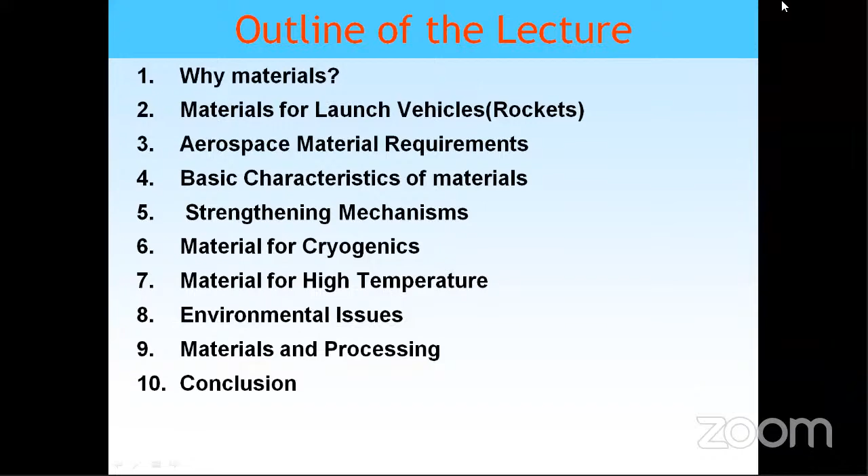Then finally, I'll come to some of the materials I have developed, which I have got some passion for. I developed a lot of materials, but these are some special things that I developed. Finally, I'll conclude. Thank you.

Materials for space applications work in a wide range of environments. Each gram of the structure with respect to the payload is very important. Every time we try to modify the upper stage - I mean rocket, actually we have a lower stage and upper stage. Upper stage will carry the satellite, and we do a lot of research to bring down the weight so that we can increase the payload. Another interesting thing is in a rocket engine, the same material used will be exposed to propellants, sometimes extremely low temperature as low as liquid hydrogen temperature, that is -250 degrees centigrade or 20 K, or high temperature during operation, it goes to temperature even more than 1000 degrees centigrade. So the material has to work in both conditions, either low temperature or very high temperature.

Then the material decides the cost of placing the payload into orbit. For expendable launch vehicles, the cost of placing 1 kg of payload in geotransfer orbit is about $30,000. So if I additionally put 1 kg, I can save $30,000. For reusable launch vehicles, this figure is proposed to be something like $1,000.

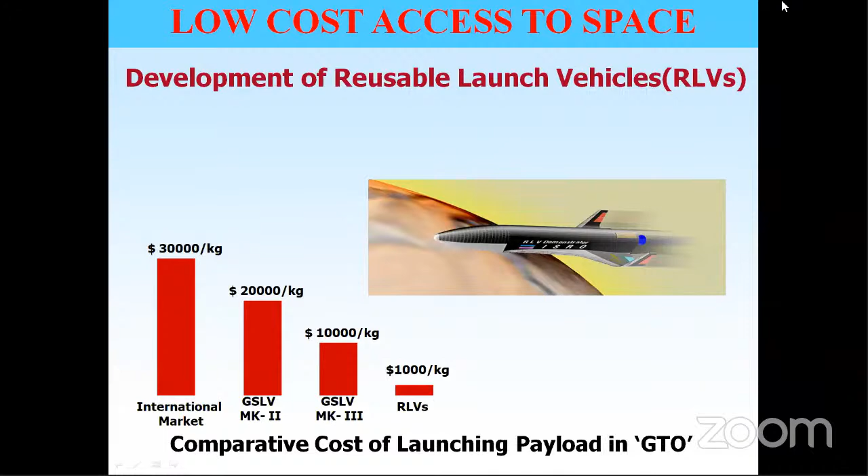These are our three launch vehicles which we use in ISRO. One is PSLV, which is mostly a 4-stage vehicle. We have a solid stage at the bottom, and the second stage is liquid. Again, third is solid, and the fourth one is liquid.

I worked in both VSSC as well as LPC, and I got good knowledge about all these materials used in PSLV, GSLV, and Mark 3. In GSLV, we use the cryogenic stage. Because of that, it can take 2,200 kg to GTO, and I'll show you why cryogenics is important for taking more payload.

GSLV Mark 3 is actually a 2-stage vehicle to GTO, and it can take 4,000 kg to GTO. We have 2 solid strap-ons and 1 liquid stage and a cryogenic stage. Now we are trying to develop a semi-cryogenic stage which uses liquid oxygen and kerosene. Once that is developed, this 4,000 will suddenly become 6,000 - that means 2 tons of payload straight away again. We are keenly developing that; I think within 1 or 2 years it will be ready, so we can take up to 6-ton payload to GTO.

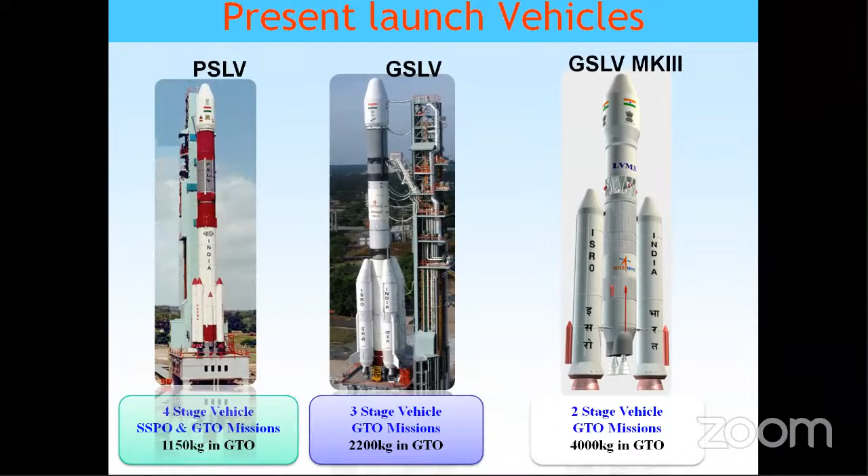Now these are the major materials used in PSLV, GSLV, and the PSLV upper stage. We use the lightest magnesium alloy for electronic housing, heat shield aluminum alloys, and titanium alloy tanks. Let me highlight some important materials.

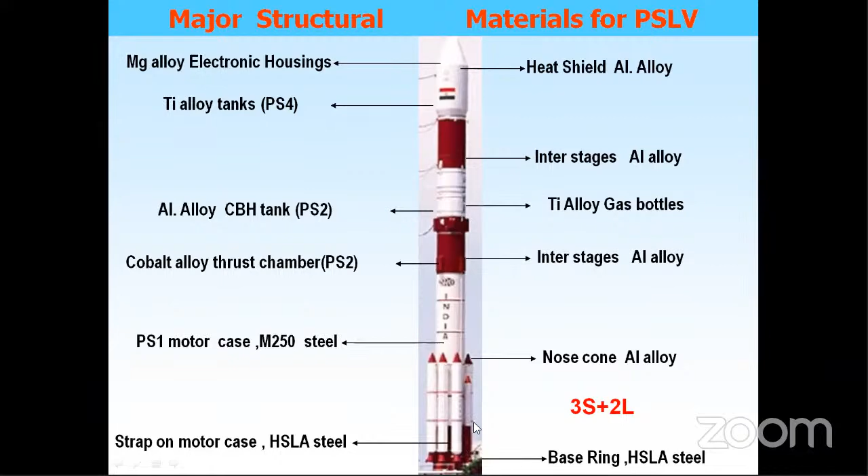Aluminum tankages are used for carrying the liquid propellants. There is a cobalt alloy system used for the liquid engine, where the temperature reaches as high as about 1100 degrees centigrade. The motor case is made out of M250 maraging steel - that is our workhorse material. The strap-on material is HSLA steel containing 0.15% carbon. These are the important things about PSLV materials.

Then we have GSLV - same thing, except the difference is we have cryogenic tanks here. Both are made out of aluminum, for storing liquid oxygen as well as liquid hydrogen. Then we have a cryogenic engine which contains copper and special steels for cryogenic application.

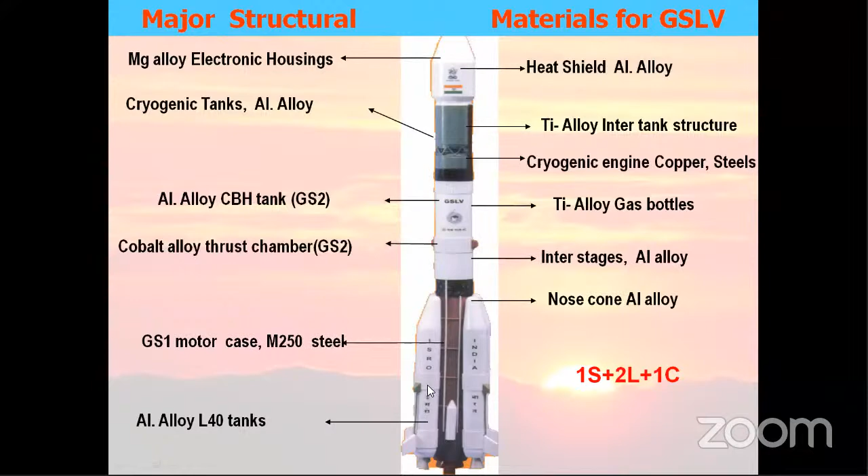Similar to PSLV, we have a liquid engine where we use cobalt alloy for the thrust chamber. Instead of solid, here we have liquid engine strap-ons, so we use aluminum alloy 2219, which is an aluminum-copper alloy, as the tankage material. The engine again is made of the same cobalt alloy, and there's a maraging steel booster.

Then comes our GSLV Mark 3, a 2-stage engine, where we have 2 maraging steel strap-ons, S200, and one L100 aluminum alloy tank. There again cobalt alloy is used, and this is a cryogenic stage where we use liquid hydrogen and liquid oxygen, giving about nearly 20 ton thrust. Here the satellite will be placed.

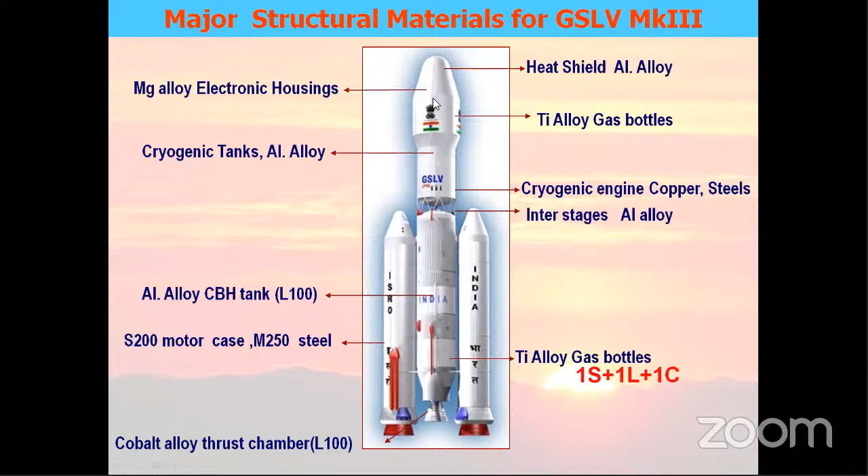As I mentioned earlier, why are we so much concerned about cryogenic propellants and stages? What we need is high propulsion energy per unit mass. LOX - liquid oxygen and liquid hydrogen combination - gives the highest combustion temperature, about 3,500 K, and the lowest molecular weight of combustion products.

Am I audible? I'm sorry, am I audible? Yes sir, you're audible. Okay.

Then we have a new term - normally only rocket engine people use this term known as specific impulse. That is actually combustion temperature divided by the square root of molecular weight of combustion products. So the specific impulse of cryopropulsion yields about 445 to 456 - highest performance is essential.

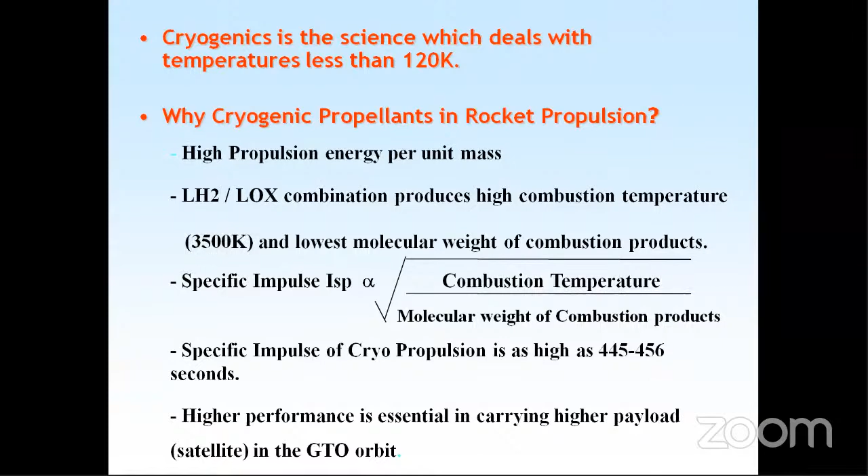In other words, it is the efficiency of the fuel-oxidizer system to give 1 kg of thrust - 1 kg of propellant fuel system gives 1 kg of thrust, and it is a duration. That means it's the duration through which 1 kg of fuel combination gives 1 kg of thrust. So cryogenic gives the maximum duration for giving this thrust, meaning it can take more payload and travel further. Here are some of the propellant combinations and their specific impulse.

Like we have N2O4, nitrogen tetroxide, and methyl hydrazine; unsymmetrical dimethyl hydrazine gives 295, and these are all actually used in liquid engines. And we have mixed oxides of nitrogen, that's MON3, and monomethyl hydrazine gives about 305. This is what we use in the satellite to reach geostationary orbit as well as for orbital control. This fuel only we are using.

And then we have the LOX. These are 1, 2, 3. All three we are using in ISRO's program. In fact, outside, NASA, the Russians and all are using all of these. We have LOX kerosene, which we are developing, known as a semi-cryogenic engine, which gives about 335, and LOX methane gives about 350 to 360. That is the new Raptor engine which SpaceX is actually using.

Hello, yeah, tell me, anything else? Can I continue? Yeah, you may continue, sir.

Okay. LOX methane is giving 350 to 360. Why am I talking about all this? I cannot use the same material used for these two fuel combinations, which we call earth storable. That means it can be stored on earth. So we call them earth storable engines or fuels and oxidizers. Whatever I used here, I cannot use for this application. For LOX kerosene, majority I can use, but in some special areas I have to use different material.

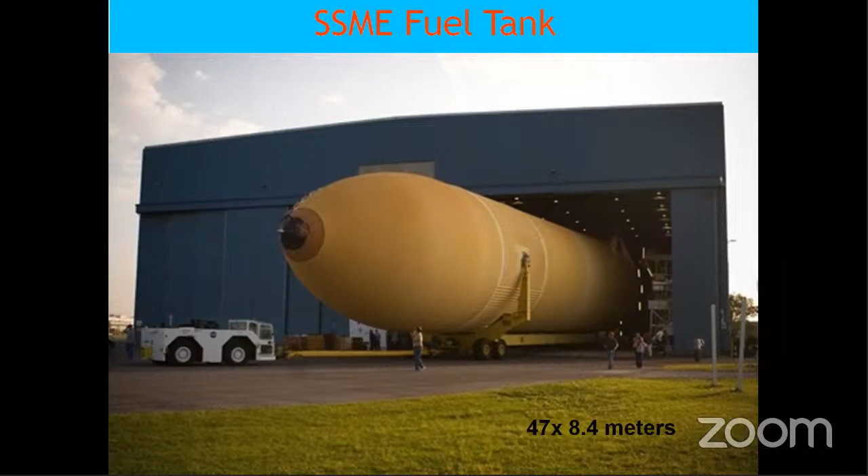But NASA, for the last flights of the space shuttle, used aluminum lithium alloy, which we'll discuss in my presentation, which has a much superior payload gain. So they switched to that. Welding such a huge thing is why I'm telling all this. In a cryogenic tank, because hydrogen is lightweight, we have to make tanks as big as this. That's why SpaceX is not using cryogenic tanks; they are using only LOX kerosene or LOX methane, which doesn't need such big tanks. Even though there is a loss in specific impulse, they are managing with that. They make a lot more engines instead of making one cryogenic engine. So that is the newer approach.

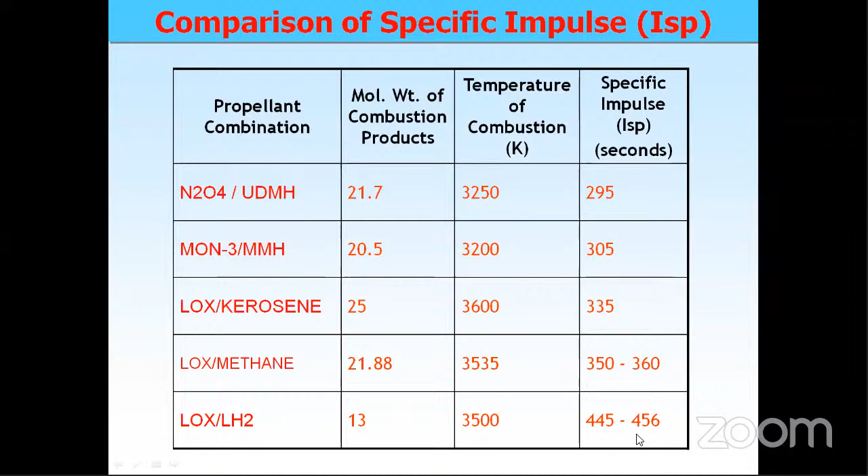Now we'll come to the aerospace material requirements. Till today, you can see all this. Till today, I don't have a single alloy which meets all these requirements. Okay, one alloy which is very close, almost 60% meeting, is actually our workhorse material called maraging steel, which my ex-bosses in VSSC, Sri Kumar sir, Dr. Sinha, are actually the developers of this alloy. And I'm proud of them because that was a successful indigenous material, and then this flight.

So we have a high strength to density ratio, specific strength, that's very important in order to give the maximum payload gain. Then we have high elastic modulus to density ratio, specific modulus. Then we have adequate fracture resistance. Everything maraging steel is giving, except for K1SCC. The K1SCC is nothing but fracture toughness in stress corrosion conditions. Actually, stress corrosion resistance of maraging steel is very, very poor.

Then easy fabricability and easily weldable. That is one very, very important, because I can make a lot of alloys, but if fabrication is difficult and it's not weldable, it's a problem. Simple heat treatment. Compatibility with the propellants, that is very important, and for fluids that I was discussing earlier. Then it should meet the functional requirements, easy availability and reasonable cost.

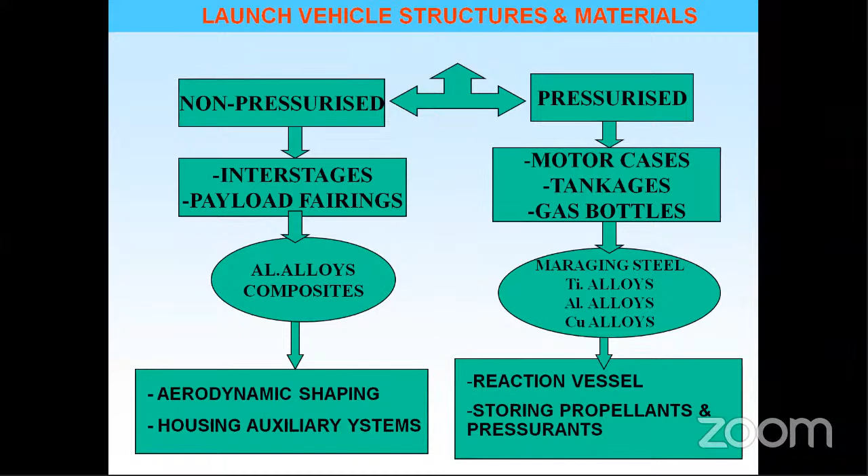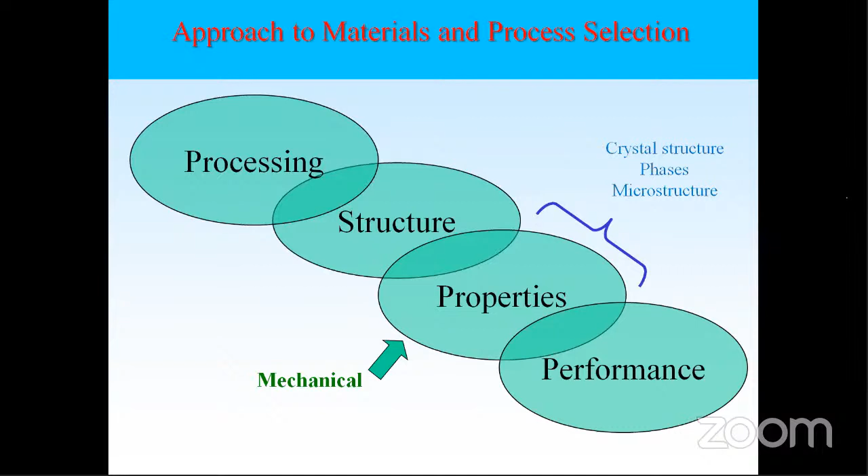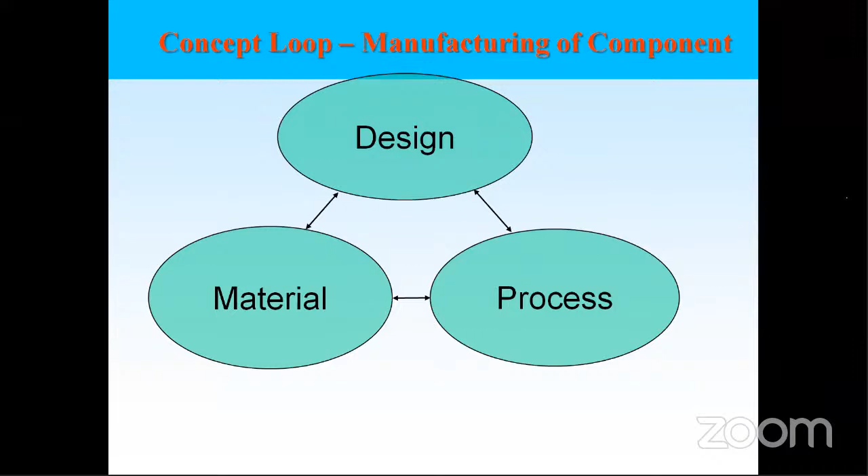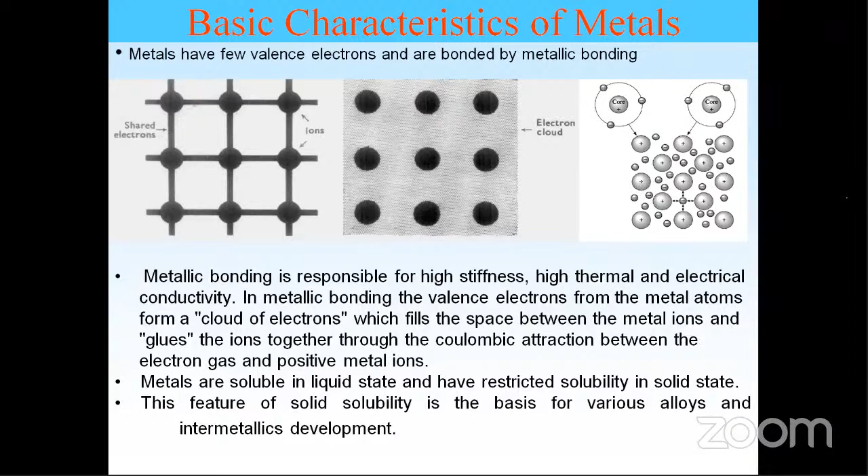Metals are soluble in liquid state and have a restricted solubility in solid state. So this is the principle of our heat treatment. And this feature, solubility, is the basis of various alloys and intermetallic development. Then this also you have studied mostly, but I just want to refresh it, because for every application, selection of material with respect to crystal structure is very, very important.

And in general, I'll tell you, FCC materials can be used at low temperature as well as high temperature, and ambient temperature also. Take the case of steel: all austenitic stainless steels are FCC, and they can be used at all temperatures, high temperature, ambient temperature, as well as low. Of course, nickel alloys fall in FCC, so they can be used at low temperature also. But normally at ambient temperature they are not used, because they are highly alloyed, so it will be costly.

So they are not very much preferential for the ambient temperature application, but they are needed for high temperature application as well as low temperature application. Then comes BCC, that is our normal steels, which is normally used only for ambient temperature application. They can be easily welded. But usage of this material is not advisable for low temperature as well as high temperature, because at low temperature they become brittle, and at high temperature they become too plastic. They don't offer any strength.

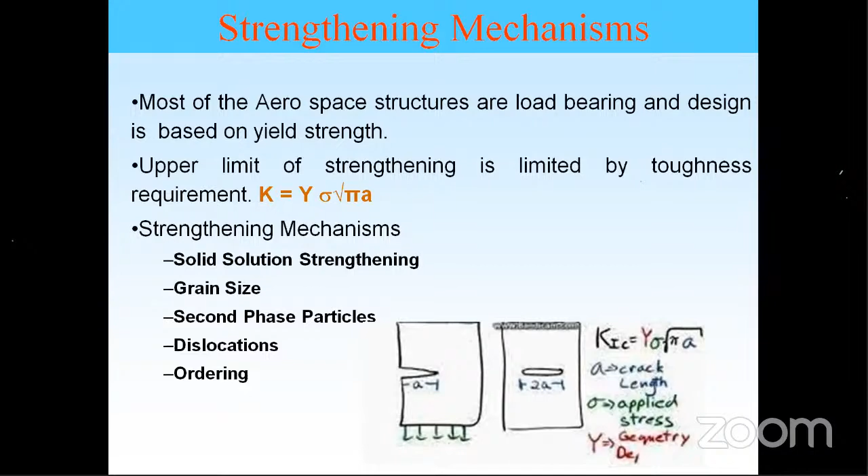Then we have dislocations. Dislocation is nothing but your work hardening, which introduces them; that's a cold worked material. It is a highly dislocated material. Ordering happens in superalloys, where the precipitates have an ordered structure.

Then we do a lot of testing to understand how a material deforms, elongates, compresses, twists, or breaks as a function of applied load, time, and temperature. All these are very, very important to select a material for aerospace. So first we have to see what testing we have to perform, so that you can select the material.

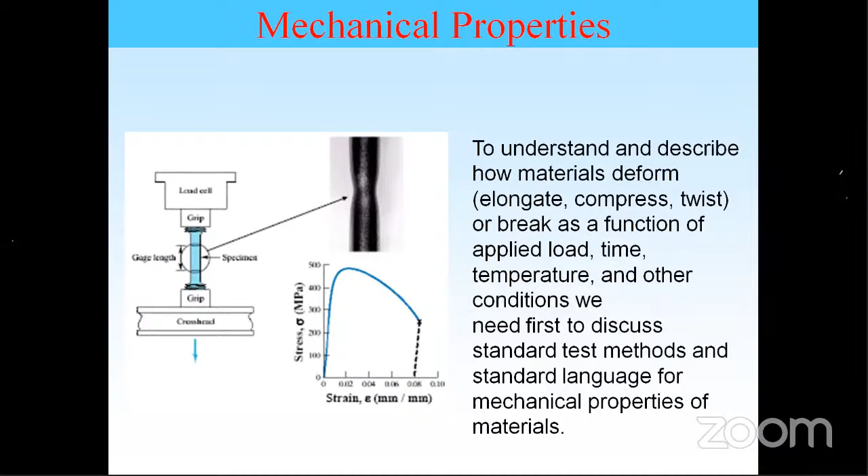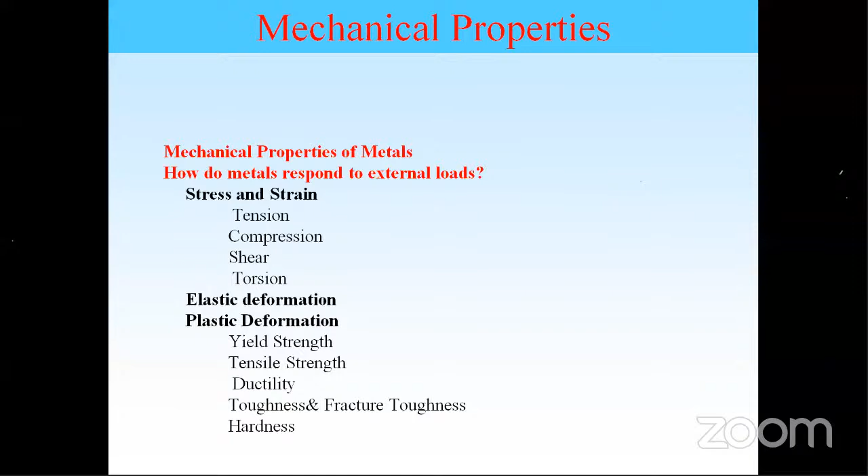Then we have tension, compression, shear. From there, yield strength, tensile strength, ductility, toughness, fracture toughness are some of the things we may measure. And of course, this is done both for parent material as well as the weld coupon or brazed joint. Before the actual use, we will be doing the testing to evaluate the mechanical properties of the material.

Then this is a tension test, with various stages. After the ultimate load, we have necking. Then finally the material fails. For tensile strength, materials up to 2000 MPa are also available. For structural application, yield stress is usually a more important property than tensile strength, and I can cite some examples.

Austenitic stainless steels, whatever we normally use, have a tensile strength of 500 to 550 MPa, and the YS is 200 MPa. That means the UTS is nearly double the YS. But when we take the case of maraging steel, 1725 MPa is the YS and 1750 is the UTS. That means it is very, very critical. There is not much work hardening happening in the case of maraging steel, whereas in the case of stainless steel there is a sufficient amount of work hardening, because there is a gap between yield strength and UTS. So this is very, very important.

Taking the design parameter: design stress is nothing but sigma d = n sigma c, where sigma c is the maximum anticipated stress and n is the design factor, which normally should be more than 1. We also make sure that the design stress is less than the yield strength. The safe working stress, sigma w, is YS by n, where YS is the yield strength and n is the factor of safety. Normally we go for 1.5 to 2. So that is the design parameter, the factor of safety we normally take.

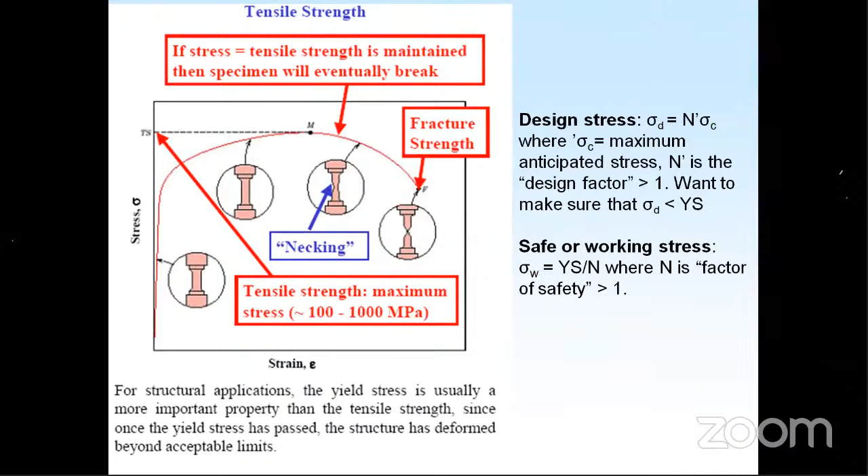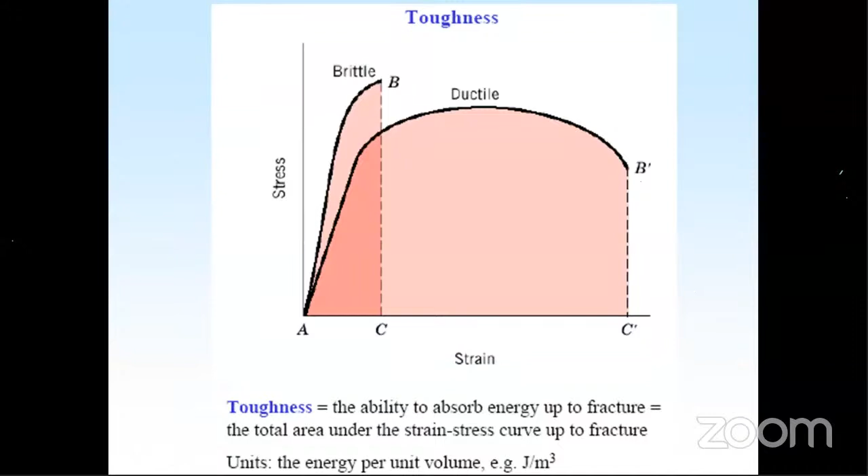So this is the typical stress strain curve. We have brittle and ductile materials, which you may be knowing. The area under the curve is your toughness. Brittle materials have lesser toughness, and ductile materials have more toughness. Then we come to the

Ashby charts. This is what I want to highlight. I've been working all our time only on this area. My younger brothers, you should work on this now, because we have done enough. So now it is your duty to enter into these areas. We still have a lot of scope here, but some gray areas are there in composites and ceramics that you should address, because the world is going that way.

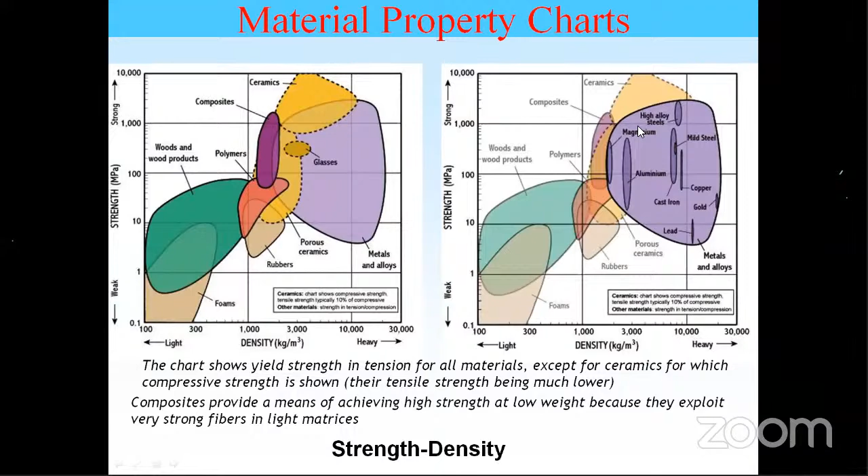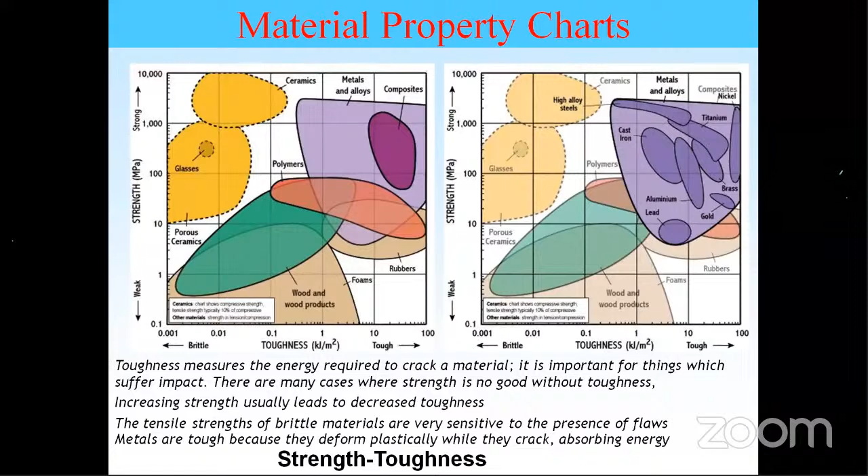My younger students should work on ceramics, glasses, polymers and composites to make a material which is in line with our metals and alloys. Among metals and alloys, titanium and nickel are the best. In fact, the advantage with nickel is that nickel is the only alloying element in steel which gives toughness. So all nickel containing steels show very high toughness, and nickel alloys also give high toughness.

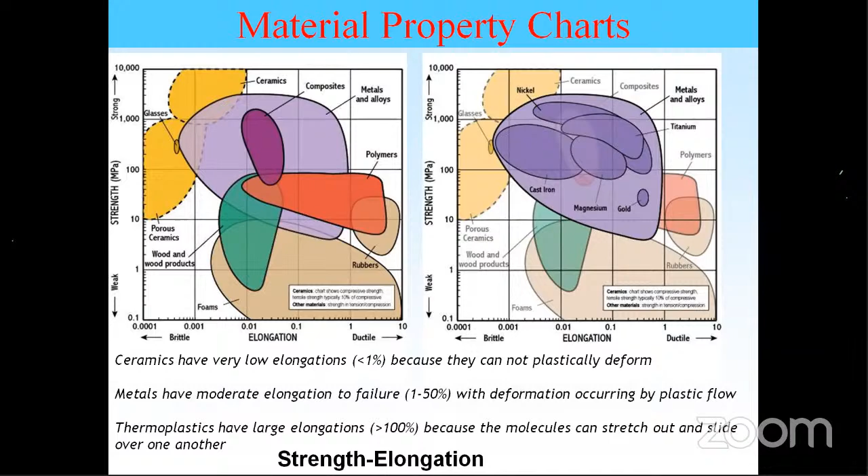Then we have strength and elongation. This is very important. In fact, we want the right corner; this corner is actually good. So there again metals and alloys dominate over all ceramics and composites. Here it's strength and elongation. Elongation is important because to form a shape, to form a component, for all forming operations, elongation is very, very important. So strength and elongation is very important, and strength is also required. So for this combination, the best things are still metals. So long way to go.

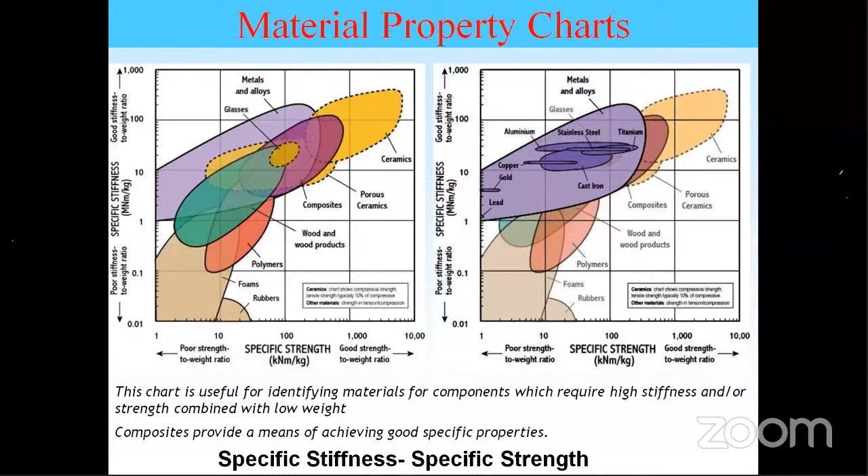Then if you do tensile testing of BCC and FCC materials, there is not much difference in UTS. But when you test the YS, for FCC material there's not much increase in YS, but for BCC there is a very big increase when you go to low temperature. That means at some point the YS and UTS will merge, and that is the point the material will become totally brittle. FCC means all austenitic stainless steels, copper, aluminum alloys, nickel alloys, silver, etc. BCC are ferritic and martensitic steels, columbium, iron, chromium, molybdenum. HCP is titanium, zinc, magnesium alloys.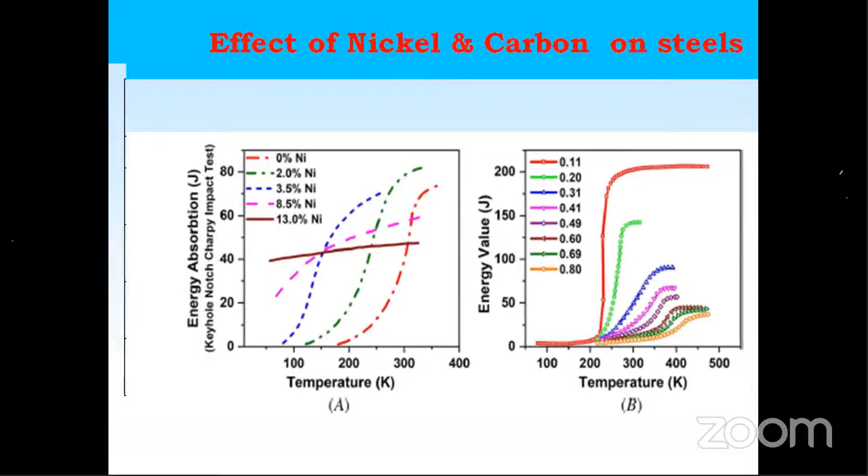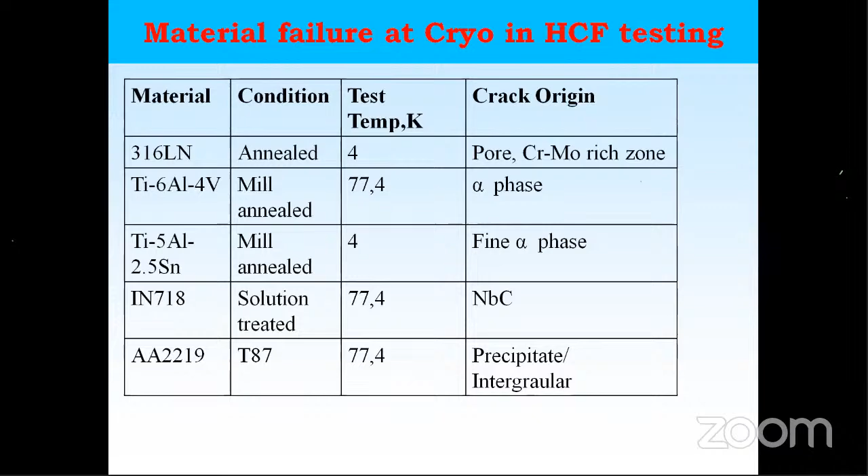Then these are some of the material failures happening at low temperature. We have 316 austenitic stainless steel, normally tested at 4K, that is helium temperature, where the failure origin is a chromium molybdenum inclusion. For Ti-6Al-4V titanium, it is the alpha phase at 77K and 4 Kelvin. For the alpha alloy at 4K, the fine alpha phase is the crack origin. For Inconel, known as a super alloy which we regularly use, it's niobium carbide; it's not a cryocompatible precipitate. Then 2219 has precipitates in the intergranular area. Those are the crack origins.

Then for low temperature, this is my view. I have already made most of the cryogenic materials for ISRO. My view is that for metallic materials there is no UTS and YS specification. If you see any standard AMS specification, there is no specification, because when I test a specimen of any material at room temperature, I mean steels, I get a very consistent value at ambient temperature.

The same specimen, if I take it to low temperature, up to 77K, that's LN2 temperature, gives different values, because a small defect or discontinuity present in the gauge length can alter the value. Even carbon in incidental amount locally present can change the value. So UTS and YS properties are very sensitive to defects as well as the deformation state. If I do some cold work or elastic deformation and test it, the value changes. So I don't have a fixed value.

So what we do at cryo temperature, all materials gain strength and lose ductility and toughness. So I give more importance to toughness testing - that is impact testing, fracture toughness, NTS, that is notch tensile testing. This ratio should be more than 1.1 at cryo temperature. If it is more than 1.1, it is safe. So the modern way of testing is to do a fracture toughness testing and evaluate the value.

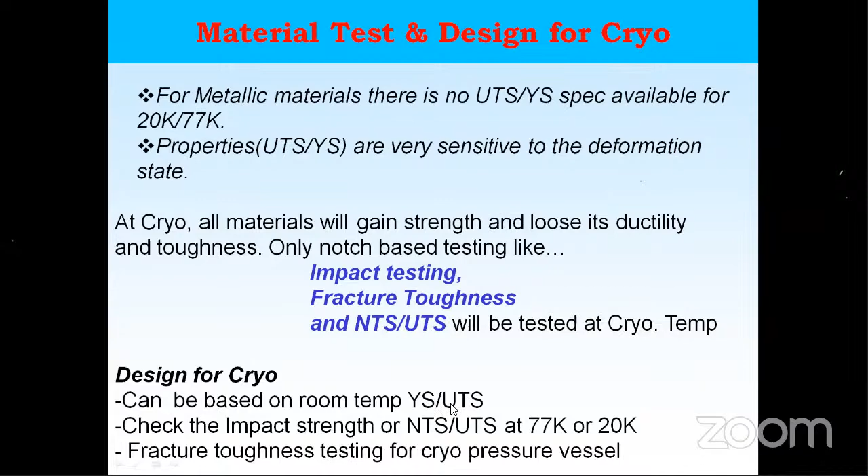Like that, the first screening is to go for impact testing. Then if it is a pressure vessel, go for fracture toughness design. If it is impact testing, then you can use room temperature YS and UTS and make your design, so that you'll have a sufficient margin. And the fracture toughness testing can be used for cryo pressure vessel.

Another physical property is thermal contraction and expansion. This happens in low temperature. A large amount of contraction occurs when materials go from high to cold temperature. So this impacts the alignment. Different materials have different alpha values, and development of interferences or gaps due to dissimilar materials leads to increased strain and possible failure, and phase transformation. So some of these things can happen with thermal contraction.

Specific heat, normally CP, decreases, and it has got two important points. First of all, the system cools down faster as it gets colder. At cryogenic temperature, small heat leaks can cause a large temperature rise because of the low CP.

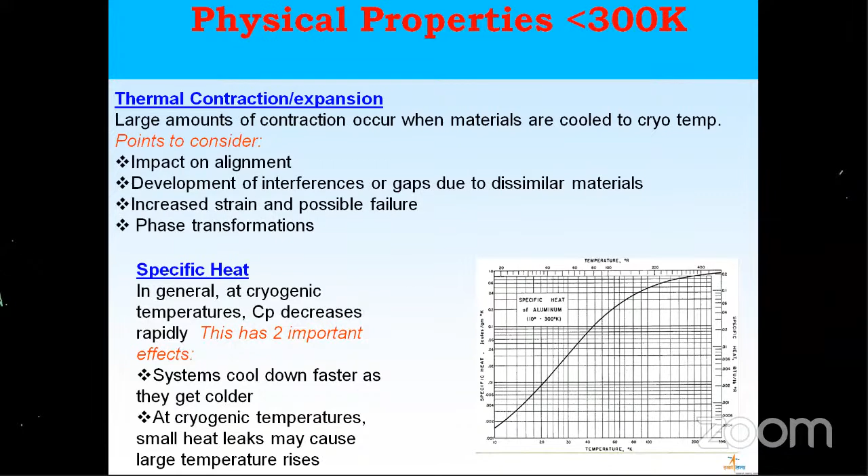Another important thing is the electrical resistivity. At room temperature it may not be noticeable, but when you go to low temperature, the purity of the material becomes very, very important. So there is a residual resistance ratio, RRR. It is the resistivity at 300K divided by resistivity at 4.2K. This shows the purity - purer the material, it shows very high thermal and electrical conductivity and very low electrical resistivity. This is the basis of superconductivity for metals.

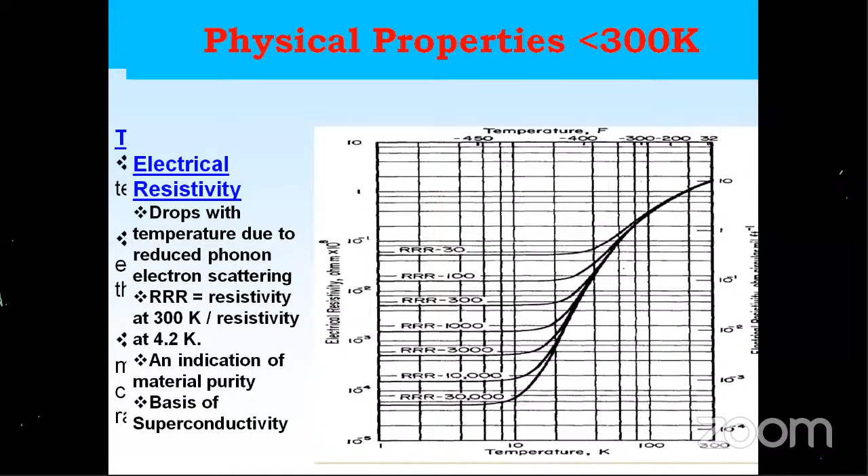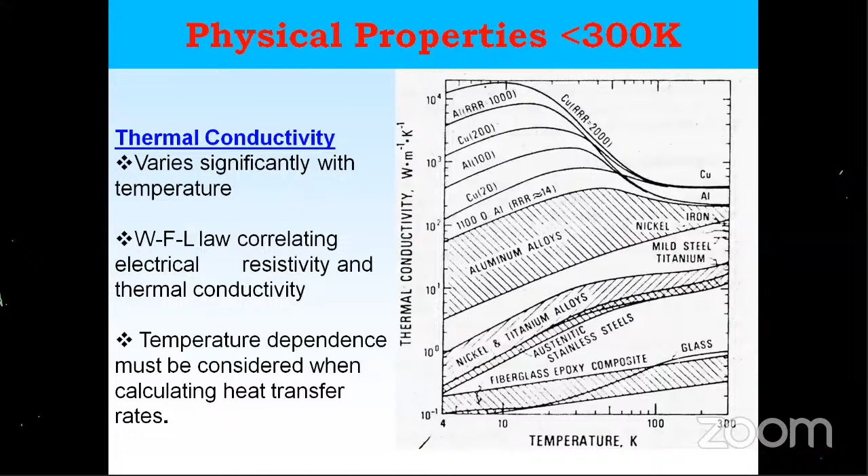Thermal conductivity for high RRR value increases at low temperature. Most of the alloys, it falls down. We have a relation between electrical resistivity and thermal conductivity, known as the WFL law.

So that's about how you select a cryogenic material - we go for impact testing and use the room temperature YS and UTS value for the part design. For high temperature, it is very interesting because most of the materials, we are storing propellants and firing, so many materials are exposed to high temperature.

At high temperature, again ceramics dominate in the charts. Among metals, nickel is the best material - FCC alloys, nickel-based alloys, and cobalt-based alloys. All FCC materials are actually best. All other materials are not good. Again, ceramics can be used. So we use a combination of alloys plus ceramic coating to increase the maximum surface temperature.

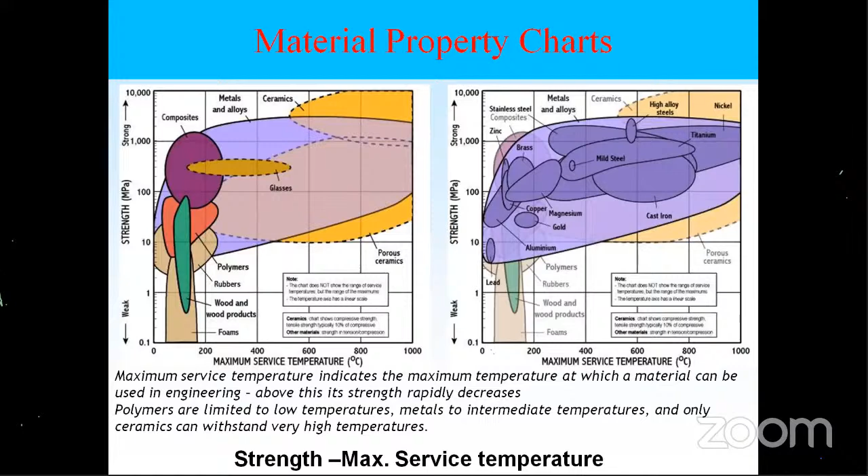Every 6 months I see a paper for super alloy development. At present the best super alloy can go up to 1200 degrees centigrade, and precipitation hardening alloys can go up to 850, 800 degrees centigrade with very high strength. It retains strength up to 850 degrees centigrade.

We don't need any oxidation protection coating here because superalloys contain a lot of aluminum and chromium, so that will protect the material from oxidation. Whatever we have beyond this - refractory metals, ceramics, graphite - all need a lot of protection coating from oxidation. Graphite gets silicon carbide coating, and refractory metals get special coatings to prevent oxidation. We use refractory materials like columbium, molybdenum, etc.

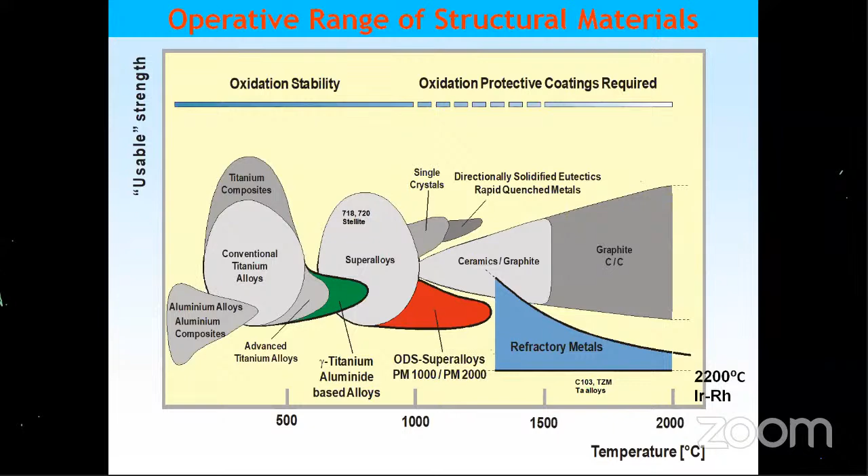How do you make a high temperature material? We have 2-3 techniques available. First, we go for solid solution hardening, like in cobalt alloy Haynes 25, where molybdenum, tungsten, hafnium - everything has been added to give solid solution strengthening, and it is not heat treatable - you can ideally use it as is. It will work up to 1100 to 1150 degrees centigrade without much issue, and with a coating it can go up to 1200 degrees. But the strength of the material is very low.

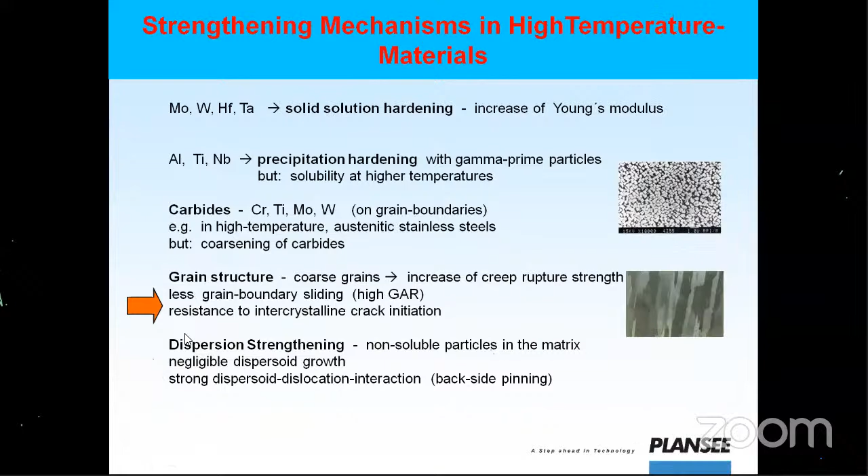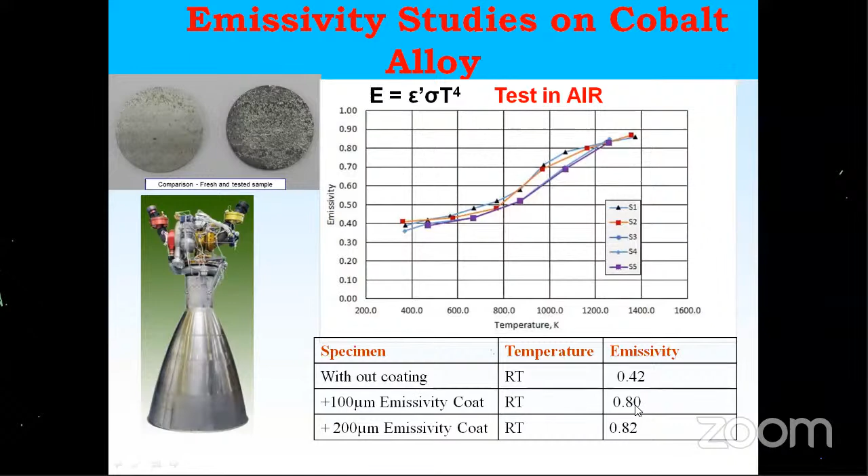For a radiator, there are two kinds of cooling happening. One is regenerative cooling - the regenerative cooling, nothing special is required. But when you are cooling with radiative cooling, like a single sheet, when you have a single sheet and heat has to transfer to the atmosphere, then we need a dull surface outside. So we need a dull surface like this, which gives an emissivity as high as 0.8. That's about the heat escaping to the outside.

Now, during combustion, the temperatures are reaching, as shown earlier, 3000 K. Now, to arrest the heat transfer to the chamber material, what we do is give a ceramic coating, which I was mentioning. Ceramics, especially zirconia, have a good property - they have a poor conductivity of one watt per meter Kelvin or less. So this will eventually break the heat transfer to the chamber material.

There are two kinds of coatings. It's done like this: first, this is the substrate material, then the bond coat, and over the bond coat we have the ceramic coating. The bond coat is normally nickel aluminide or a combination of many metals, and the ceramic coat is based on zirconia. There are two kinds of zirconia available - one is calcia stabilized and one is yttria stabilized. Both prevent the material from being heated up by the hot gases.

Normally in our engine we get about 50 to 100 degree margin. That is very good, and a comparison has been given. Interestingly, we call this nickel chromium aluminum yttrium, and this is 8YSZ. This has also been used in our aircraft - all Airbus and Boeing. They are also using it, and in fact Air India has got such a coating facility available in Bombay.

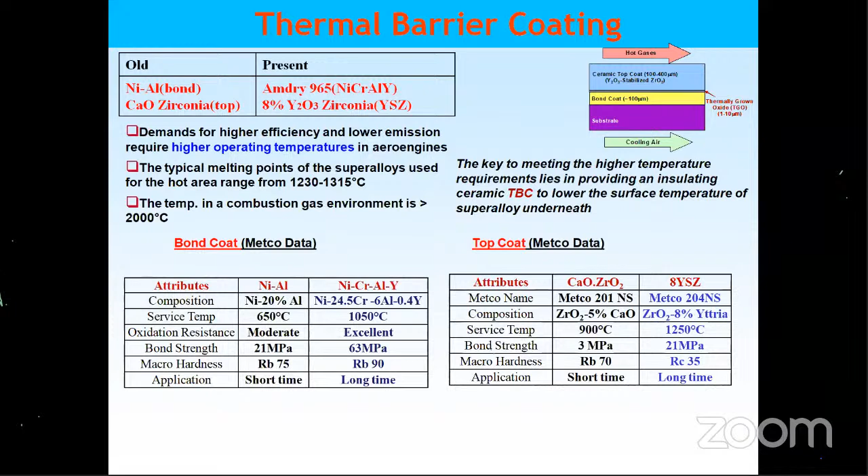Then, this is very, very important. This is, in fact, my own finding or my own idea actually. Normally, whenever I want to test a high temperature material, imagine I want to test at 1000 degrees centigrade, a normal UTM takes nearly 1 hour to get the temperature and test. In fact, our mission, whatever Vikas engine or cryogenic engine, Vikas engine I'll take, it's a radiation cooled engine. The maximum duration is actually 150 to 200 seconds, depending upon the range.

So, to test the material property at 1000 degrees, I need 1 hour. By 1 hour, the material will be very soft and it will give a lower value. So I just wanted to know, suppose I can test the material in 150 seconds at 1000 degrees, that will give a realistic value. So that's what I have done.

So here the conventional testing is like this. Heating time takes a lot of time, almost 4000 seconds. Whereas suppose I can test within 10 seconds, then my material property will be a different thing, I'm sure. So let us see. I have installed a machine called Gleeble, where my heating rate is almost 10,000 degrees per second. So with that, I could do the test.

So what we found is that the high temperature alloy which we have used is a cobalt alloy, and initially we had done it at 1150 degrees centigrade. That's the maximum temperature we expect in our normal operation. Then we had done it at 1200 degrees, which is margin. Again, 1250, 100 degree margin. Even every 10 degree margin is very, very important.

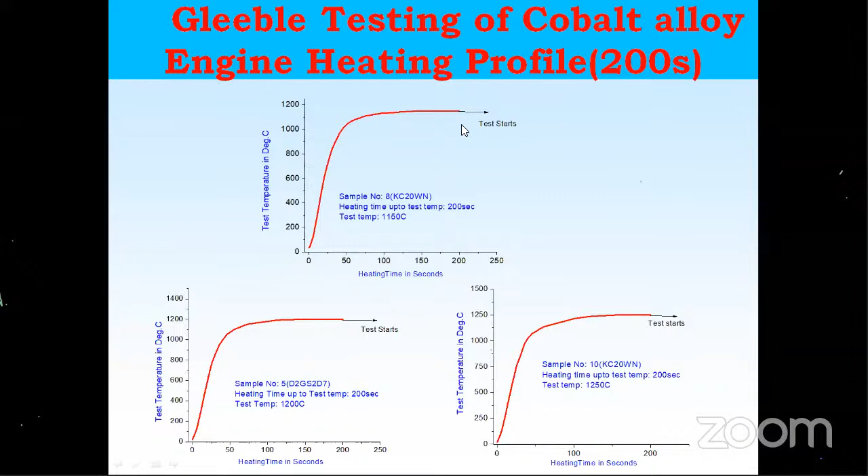And what we do is, within 10 seconds, I reach this temperature, and I keep it for the entire mission period of 200 seconds. Then I test it. That means after exposure only, I've taken the worst case of testing. Interestingly, I got very interesting results: at 1100 degrees, if I do a test the conventional way, I get only 92 MPa UTS and 61 YS. Elongation will be very, very high.

And if I do the same thing with the actual flight conditions, the test pattern I showed, I'm getting 208 UTS plus 137 YS. So even up to 1250 degrees centigrade, I'm getting a very high value. I could have gone more than 1250, but the problem is it is never warranted, so I didn't do that.

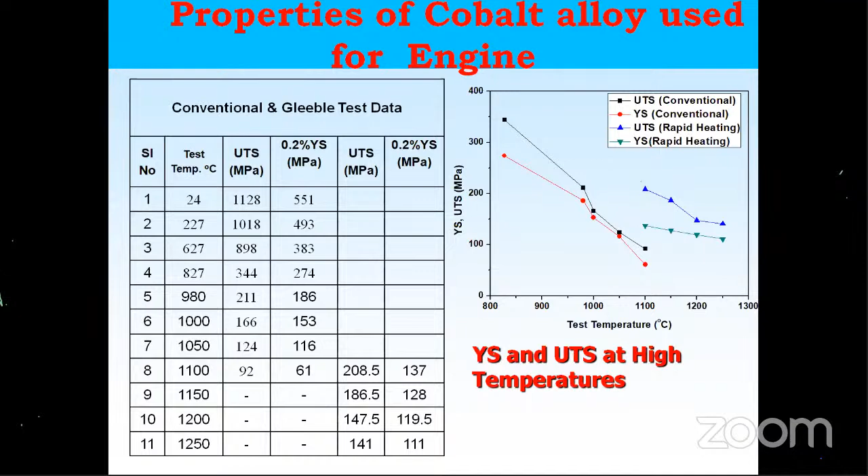So what I mean to say is, since we have a small flight period of 150 seconds, the material is retaining most of its strength. But suppose you increase the time from 150 to 500 or 600 seconds, the strength value changes. But for the launch vehicle missions we are using at present, this is the margin we are getting. We have sufficient margins, there is no issue. So if the composition is ensured, the material gives such strength.

Then we have environmental issues. Having told about cryogenics and high temperature, come to the environmental issues. Before that, I want to tell something about how a liquid engine works. Here we have oxidizer, we have fuel. For a storable as well as a cryogenic or semi-cryogenic engine, this is the same. From the oxidizer, using a booster pump, it comes to the main pre-burner. This is the gas generator. From fuel also, the same way, the fuel booster comes to the pre-burner.

The pre-burner generates the hot gases. There is an igniter, it burns there, and those hot gases come to drive the main turbine, which will give the propellant and fuel to the combustion chamber. This is the combustion chamber. And sometimes the same hot gases, after driving the turbine, will be sent here also to save the fuel and the temperature.

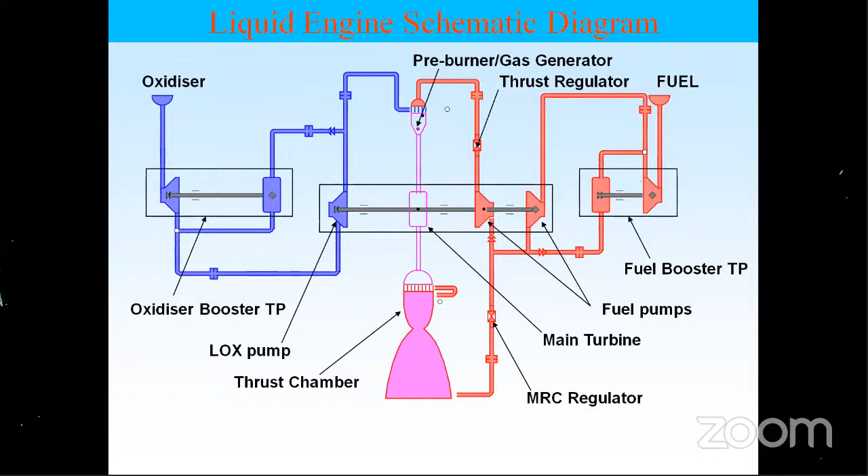So in the cryogenic engine we are using, it will be rich in hydrogen. In the case of the semi-cryogenic engine, it will be rich in oxygen. These two combinations totally change the concept of materials used there. So we'll go into that. First, we'll discuss the effect of hydrogen. Hydrogen is the best fuel. And in fact, Tata has already started working on that.

Actually, my dear students should see what the materials are useful for, because this is not an area where many people have worked. So this is a special area. We should put some light on this. It will be very interesting.

Hydrogen is the best fuel compared to gasoline, diesel, or even LPG or ethanol, and the energy per kg is much higher compared to all these. I'm so sure maybe within 5 years from now, hydrogen cars will be available. They will be cheaper than your electric cars, and greener, because with electric cars, a portion goes to generating electricity. Kerala has hydroelectricity, but other places still have to burn fuel for thermal power, so that way you're polluting. But with hydrogen, you are giving a green output product, that is water.

Compressed gas at high pressure has some storage issues, but that has been solved. Now we have up to 150 liter ready-made tanks available. Solid storage with hydrides has material and thermal problems; we cannot store it for a long time. A small experiment we can do, but for commercial purposes it is difficult. With liquid storage, maintaining that temperature is a big issue. So the only option left is compressed high-pressure hydrogen gas.

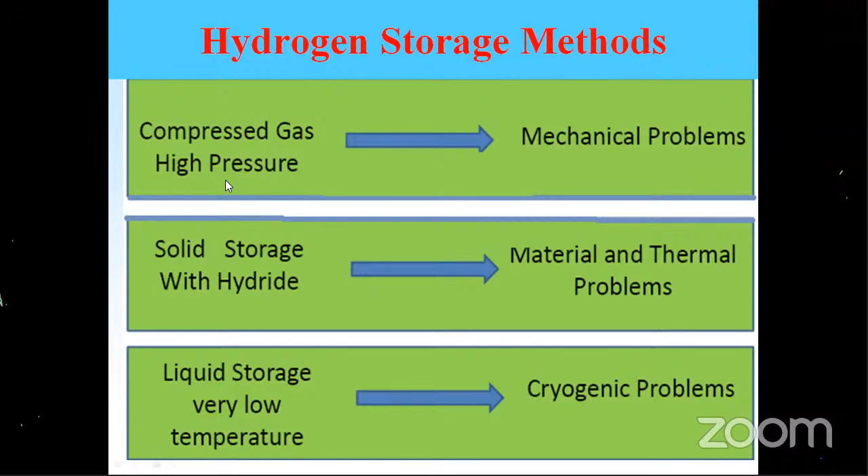All these issues were initiated by NASA. From the tank at minus 253 degrees centigrade the hydrogen comes out, burns, then drives the engine. By the process it picks up temperature, as high as about 823 degrees centigrade. From minus 253 to plus 823 degrees centigrade, it passes through many regions, where different materials are used and exposed to hydrogen.

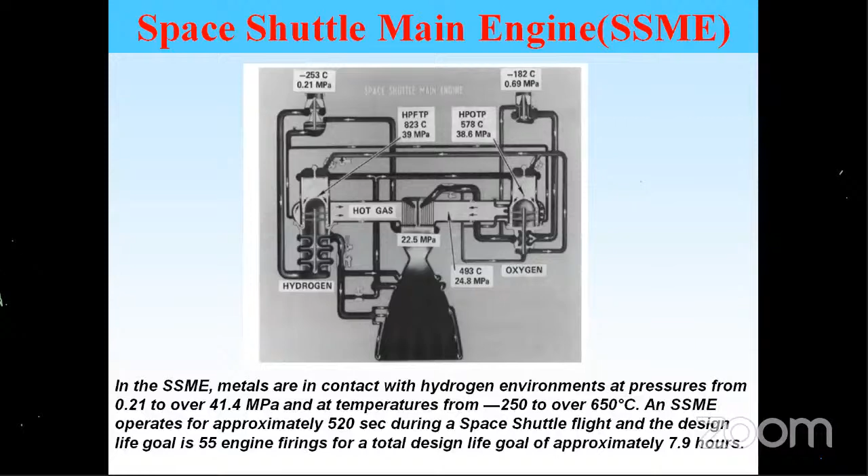Normally people talk about hydrogen embrittlement caused by internal hydrogen, meaning hydrogen deposited during electroplating or dissolved within the metal. What I'm talking about is not that. This is exposure to hydrogen gas, either liquid or gaseous hydrogen, GH2 or LH2. The SSME operates nearly 520 seconds in a space shuttle flight, is designed for 55 engine firings, and its total life is normally more than 7.9 hours.

With internal hydrogen, the failure normally happens as delayed cracking. Delayed means hydrogen enters the material and after 1 or 2 days, a week, or a month it cracks and fails. But this is different. In India we don't have any facility to test gaseous hydrogen effects. Somebody started in Bombay, but they withdrew because it is not safe. But a lot of data is available from NASA.

Like any tensile testing, you introduce a chamber, fill it with hydrogen, increase the pressure and see the mechanical properties at different pressures. The result is immediate. The moment you test a material in hydrogen gas, it suddenly becomes brittle. It's not delayed. Many materials have been classified as extreme, severe, slight and negligible, and material is selected based on that. In susceptible materials we call it HEE, hydrogen environment embrittlement: lowering of ductility and toughness, surface cracking, subcritical crack growth, faster cyclic and sustained crack growth. These are the immediate effects.

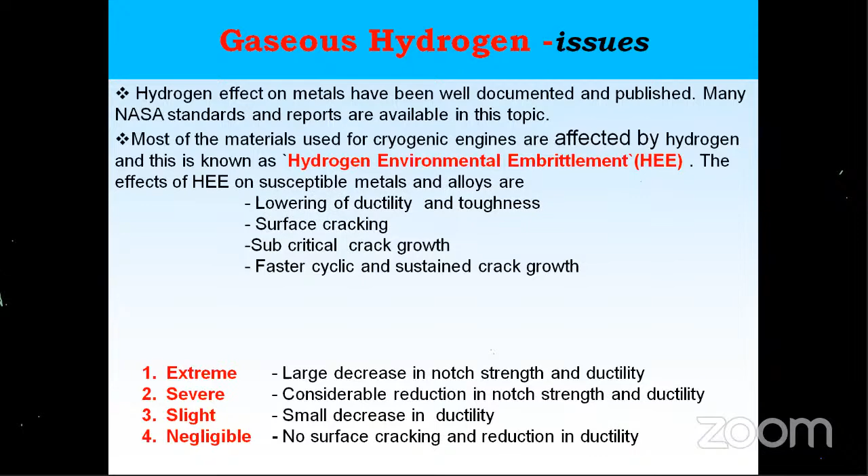Why am I telling all this? Forget about the rocket engine and rocket fuel. When hydrogen is used as an automotive fuel, this is going to be very, very important for hydrogen gas handling: your valves, lines, tanks. Tanks are no issue because aluminum tanks are available ready-made. But for hydrogen lines you have to choose a very good material, especially for valves. Valve material is going to be important.

So we have categorized extremely, severely, slightly and negligibly embrittled materials. You can see that, right? The worst material is maraging steel, and almost all maraging steels are bad.

Inconel 718 is the material used for all rocket engines. They are also bad, but NASA has not been telling how they are managing it. But I am sure they are giving some coating wherever high pressures of hydrogen are coming.

So the effect is mostly happening at room temperature. From minus 50 to plus 150 degrees, the maximum degradation is happening. If you go to very low hydrogen temperature, no issue. Very high, also there is no issue. But the effect is happening when the hydrogen is exposed at room temperature.

Now you will be asking why ISRO doesn't have an issue. ISRO doesn't have an issue because our hydrogen pressure is less than 10 MPa, that means nearly 100 bar. So we don't have much issue. We are somewhere here, whereas NASA is somewhere here. So they have a real issue, but they manage with the help of coating and selection of special materials, which they have not disclosed.

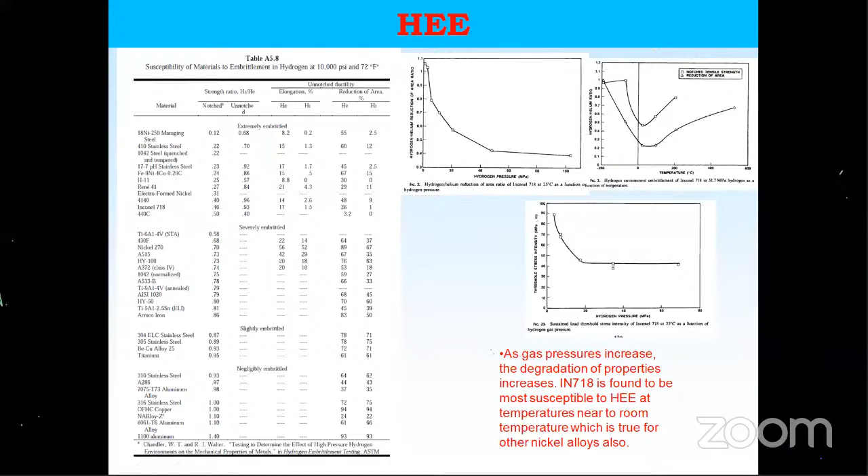Okay, good. Then this is the stress intensity. Everything comes down; fracture toughness, all this comes down. So for 718 they have done some coating and they found they have solved the issue. These are the materials shown in the table. We have negligible-effect materials: aluminum alloys, austenitic stainless steel, A286, OFHC copper.

In fact, based on these first principles, I have developed a material. It is yet to be used. It is one of my pet developments which I have done in LPSC, which I'll discuss later in this presentation.

And for prevention, gold, silver coating, cadmium, aluminum, all these are very good. A coating with low hydrogen permeability, non-porous, completely adherent, ductile and self-healing can help. Nickel and chromium cannot be used for this application.

Then we have gas bottles available for storing hydrogen, because these are readily available. Type 1 is a full metal tank. Type 2 is hoop wrapped with Kevlar, which is a composite. Then fully wrapped with carbon. Then a fully polymer liner without any metal, with metal ends. Type 4 is the lightest. In fact, we are using type 3 gas bottles for storing gaseous hydrogen.

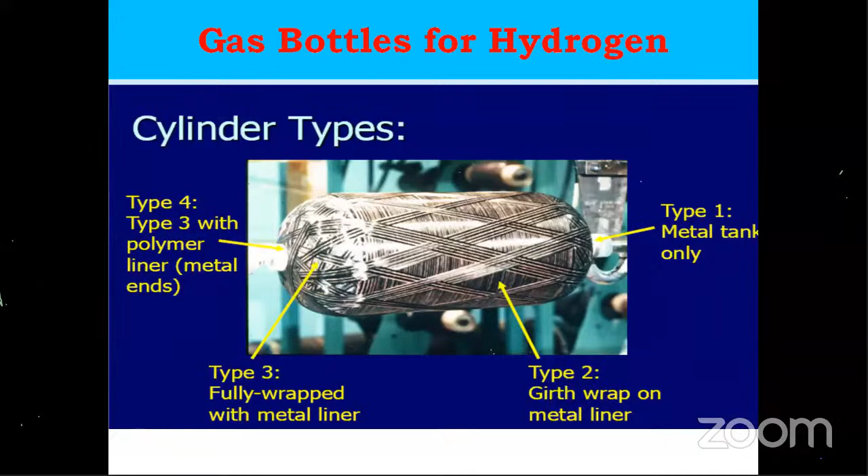Having told about hydrogen, then comes oxygen. You think it's a very normal gas which we are breathing, but it's more dangerous than hydrogen. I normally ask in my classes for my colleagues in ISRO: I have one room full of oxygen and one room full of hydrogen, which is more dangerous? People will say hydrogen. No, oxygen is dangerous. Anything will become fuel to oxygen except oxides. Till today we have no engineering materials available to resist oxygen ignition.

We have some engines where hot oxygen is coming from the pre-burner and the gas generator to drive the turbine and come to the main engine. Those areas have to be protected from the attack of hot oxygen. Metals ignite in an oxygen atmosphere under certain conditions. With LOX we don't have any issue; only GOX, gaseous oxygen, is an issue. Accidental fires do occur in oxygen systems because it enhances combustion.

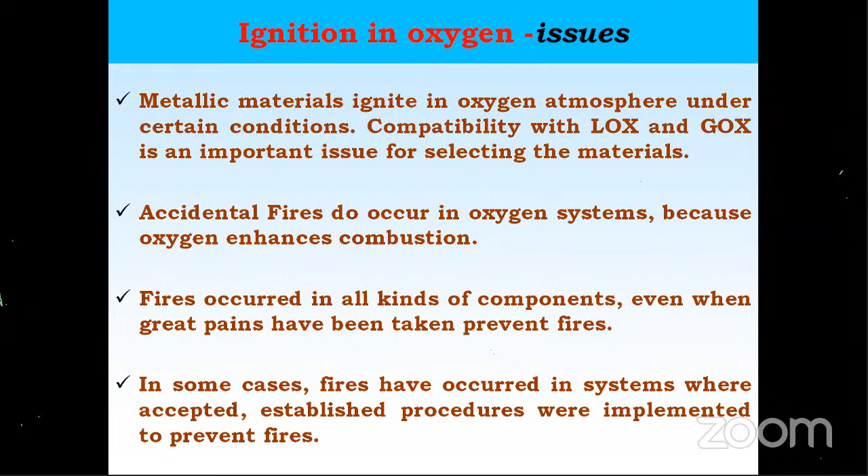Important parameters for oxygen ignition are like this. We have fuel; anything will become fuel. If the heat of oxide formation is very high, like aluminum and beryllium, it will immediately ignite. If thermal conductivity is very high, like copper, the ignition chances are less. If the material thickness is high, it doesn't ignite that fast. For example, oxygen storage tanks are very thick; even if ignition happens, the heat generated is conducted away. Contamination, some hydrocarbon fuel, will also accelerate ignition.

Coming to the oxygen state: if the temperature is high, it is more prone. Pressure high, more prone. Velocity high, more prone. Purity of oxygen, yes. Phase: if it is liquid we don't have much issue, but if it's gaseous, it's a problem. Then for the ignition conditions, the energy released from a second material can cause ignition.

Particle impact is what troubles us mostly, because aluminum particles coming from the tank can hit the side wall where oxygen is traveling. Friction can generate heat and increase the temperature. If it crosses the ignition temperature, it can cause ignition under oxygen conditions. Electrical energy, adiabatic compression, and resonance can all cause ignition. So oxidation is a slow burning of material, whereas ignition is thermal instability, where catastrophic failure can happen.

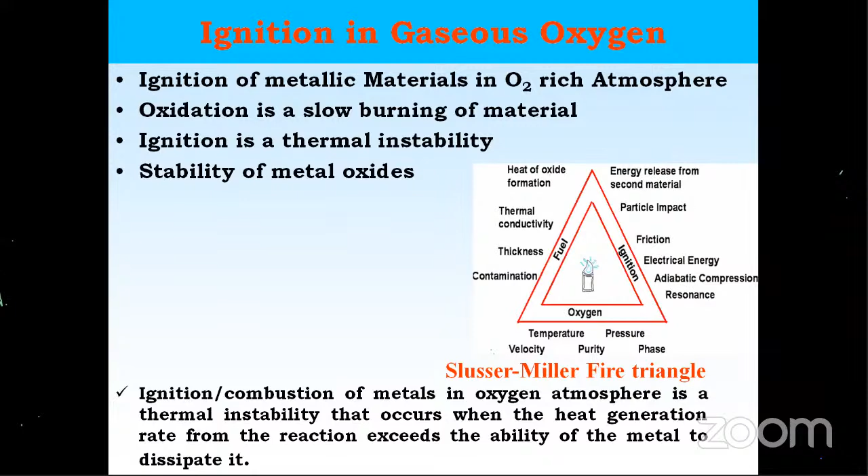A very practical example I want to show you. If you just Google it, find out about the burning of the 108 emergency ambulance. It has happened in Trivandrum and Calcutta also. I didn't go there, but I read about it. The entire vehicle caught fire, and the diesel tank was intact. The electrical things were intact, but the vehicle was simply burning. They didn't know how it was burning. They put water, nothing happened. It was completely damaged. This happened in Coimbatore.

They found out that the oxygen tank kept in the vehicle had leaked, and by movement while traveling, because our roads are very good, it hit on the side and small rubbing happened and generated heat. There is a factor called ignition temperature. It crossed the ignition temperature and became ignitable. The paint caught fire, and finally the vehicle caught fire and started burning. The metal became the fuel to the oxygen. Oxygen supply had already started, so the vehicle became the fuel to the oxygen.

This is the ASTM standard, which says which are the best and the worst materials for oxygen application. We cannot use magnesium, beryllium, calcium, titanium, zirconium, hafnium, and aluminum is also part of that. Aluminum generates a lot of heat of oxide. The best materials are nickel, copper, palladium, silver, platinum, and gold. In fact, palladium, silver, platinum, gold we cannot use; we can give a coating at maximum. They are not engineering materials. So most materials for oxygen applications are based on nickel and copper.

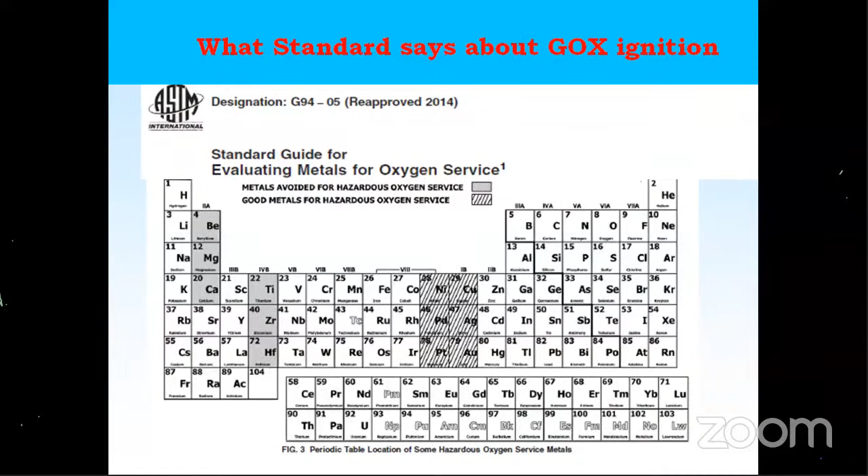I know one Dr. Monica, an employee of Boeing, who has been working on this for the last 15 years. She made an alloy, but unfortunately the forgeability of the alloy is so poor. So finally they made a powder of this alloy and through 3D printing made the turbopump and accessories, so their engine is also ready. And SpaceX has made a casting of this alloy because workability is so poor. The casting is machined and used as a turbopump where hot oxygen passes, and I think they will use it in their new Raptor engine.

So in nickel alloys, these are the common alloying elements. In a nickel alloy, when you add aluminum up to 5%, there is no issue. We have a pressure at which burning in oxygen happens, up to 69 MPa.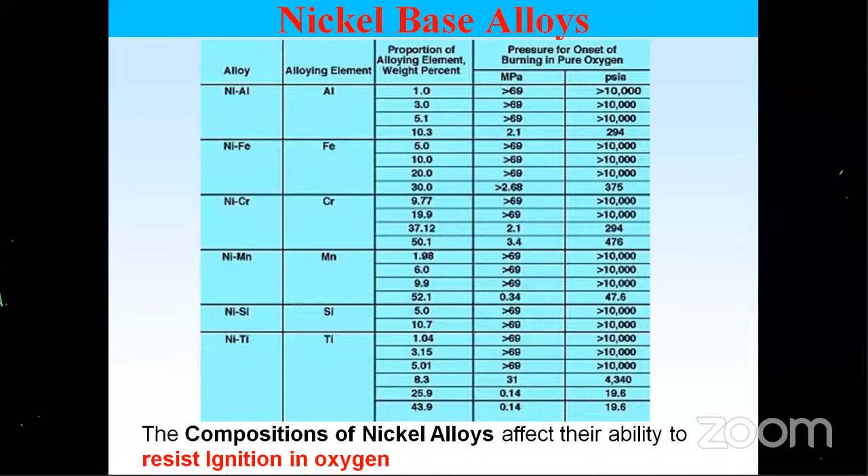From that, my colleagues in LPSC already started working to develop a new alloy. One problem we have is that we don't have the facility to test high pressure oxygen at high temperature. This is available only in our engine testing facility at Mahendragiri, and it is not a joke to test high pressure, high temperature oxygen. So this is the challenging work, how to test this. The alloy can be made, but we have to test and make a lot of compositions; only then can we optimize. So that is really hurting us.

Then we come to materials and processing. Here we will discuss some new alloys we are also venturing into. As I mentioned earlier, the Space Shuttle used an aluminum lithium tank for storing liquid hydrogen and liquid oxygen. Lithium is important because lithium addition to aluminum gives the highest reduction in density and increases elastic modulus. For every 1% of lithium in aluminum alloy, the density comes down by 3 to 4%, and the modulus increases by 6%. It gives very high strength, modulus, specific strength, low density, good formability and good corrosion resistance.

The only problem is joining. Joining is a real issue, because it can be joined only by friction stir welding. Normal fusion welding is not possible. In fact, this is a topic you can really study. Aluminum lithium metal can be made available to you. Find out an alloy composition where it can be fusion welded, because this is a challenge. For FSW, we have a facility at HAL Bangalore where we can make up to 3 meters. But somebody can make the fusion welding work. Very interesting. Literature says aluminum silicon alloy can be used, but I didn't do any experiment on that. This is a real challenge.

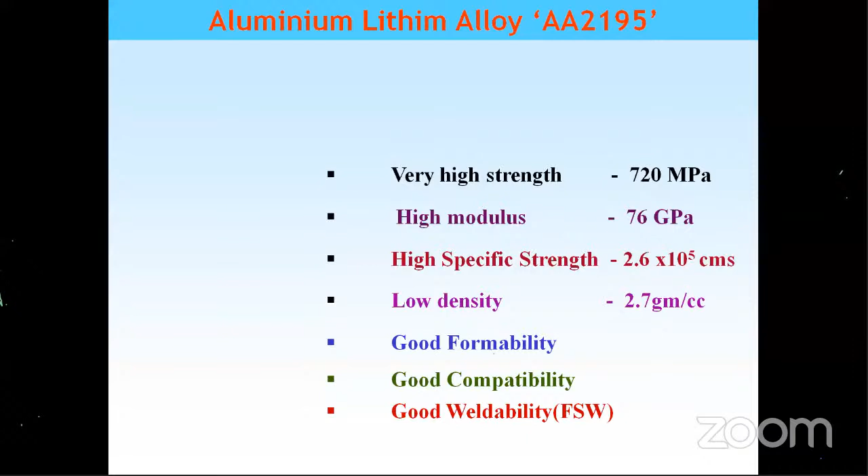Why am I after this? I told you 1 kg of payload costs nearly $20,000. For the GSLV Mark 3 cryogenic stage C25, if I change from 2219, which is aluminum copper, to 2195, which is aluminum lithium, I can increase the payload by very close to 250 kg. So imagine 250 into $20,000, a huge amount. That much payload gain is not a joke. So we are working on that.

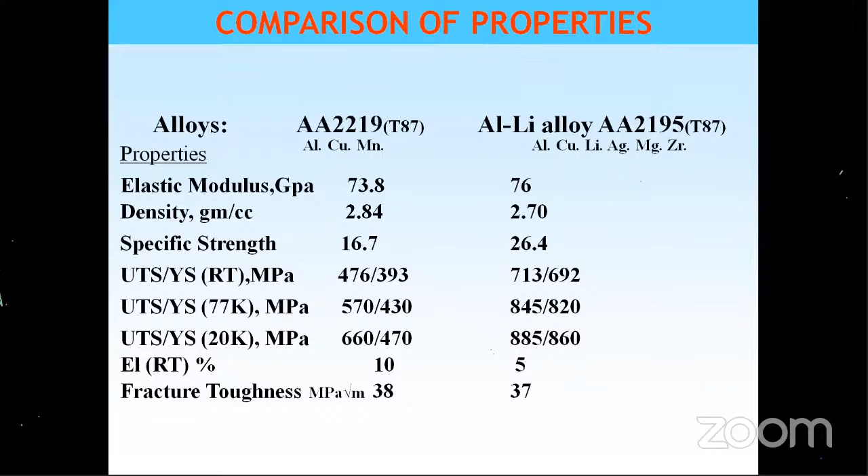These are some of the properties. It has very good properties, and density is much less compared to 2219, coupled with higher strength. That is the interesting thing. So aluminum lithium, maybe not now, but one day you will hear ISRO has switched to aluminum lithium for its cryogenic tanks.

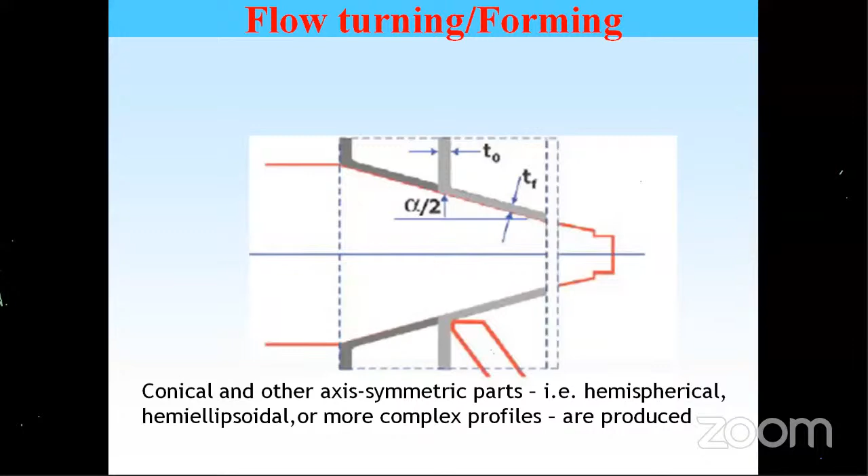Another important thing is how to make a cone. With normal aluminum alloy you can make a cone, but making a cone from a special alloy is very difficult. So we have a new technique called flow forming, and because of my pressure, at least 3-4 industries have already invested in it and are already making it. When you go home, check your cooking gas cylinder. It is a flow formed cylinder without any long seam weld. With these techniques you can make either a cone or a cylinder.

In India, at present, we can make cylinders up to 700 mm, and people are already making 1 meter. The technique is simple. We mount a small ring here, and the OD of the ring will ideally be the same. The ring will be flowed over this pattern to make a tube. We have already made them. In fact, interesting thing, this is the easiest technique to make a missile.

In fact, the best experts of the up to 1 meter class flow forming are actually from North Korea. Imagine that. No wonder why they are making so many missiles, because these are very simple to make. You make the cylinder, fill with the propellant, and your missile is ready.

In flow forming, you gain strength by flow because it's a cold work operation. And if you age it like maraging steel, it will be fantastic, because already our Bharat Dynamics in Hyderabad are doing it. Many of our missiles, the material is actually maraging steel. So that is a very important process.

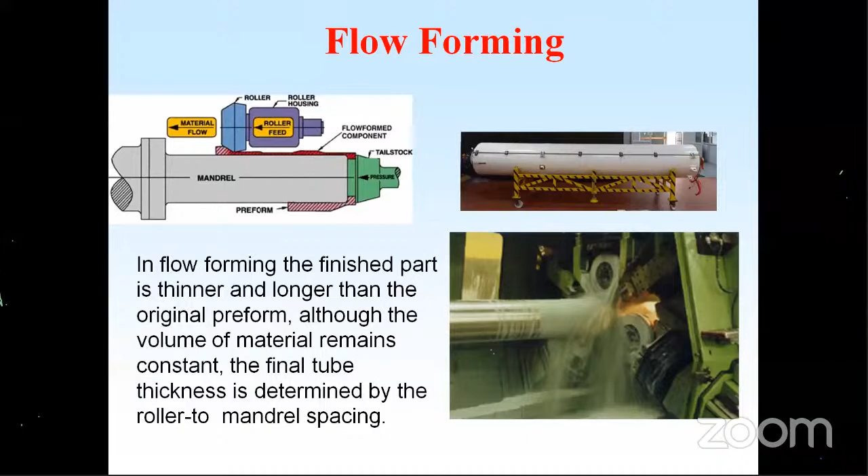Already 3-4 people have invested in this. I know 5 people in India can make up to 700 mm. Then some of the new materials, in ISRO LPSC I made a lot of materials, especially for cryogenic engine and semi-cryogenic engine, low corrosion engine. But among that, for every football team you have a special player, like I'm a fan of Cristiano Ronaldo. So like that you have many. Out of all these materials, some of my pet materials which I developed, I'm showing you.

First one is a copper alloy. This is used in the cryogenic engine. So whenever a GSLV or a GSLV Mark 3 goes up, it's my material. I'm proud of that. It is my material, it is actually flying.

The importance of the copper alloy is that this is channel milled. There will be an outer cover on this, and it will be brazed. Through the channels, liquid hydrogen will be flowing, and the inside temperature is as high as about 3,500 K. The copper temperature, because of the liquid hydrogen regenerative cooling, will reach a maximum of about 600 degrees centigrade. This is used worldwide, even NASA, ESA, or Russia, everywhere the same thing is used.

Some of the material properties required for this are high thermal conductivity. You might ask, why can't you use a nickel alloy? Nickel alloy has high strength, but the problem is its conductivity is so low, only 10 to 12 watts per meter Kelvin, whereas copper is near 300 plus. So because of thermal conductivity, the metal doesn't melt.

It contains chromium and nickel. One of the issues with maraging steel is that when you make a fastener or any sharp notched application, it fails because of the SCC issue, and the KISCC is so low, less than 20, whereas this material has got a very high KISCC. I already made and supplied this, and we formed strips used for making the Marman band of our active satellite vibration suppression system.

So this has got very good properties, all properties of maraging steel combined with stainless steel, which was one of my dream materials. In fact, when I worked with Dr. Sinha and Sri Kumar, we were having this dream. Before my return, I made it work.

Thank you. Then another thing is a nitrogen containing bearing steel. Traditionally people use 440C, but one problem is it has primary carbides. These primary carbides can cause cracking like this, after some storage time, and that causes a lot of failures. So what we did, we brought down the carbon from 1% to 0.37 to 0.45%, and we added nitrogen to balance that, because nitrogen improves the pitting resistance of any stainless steel.

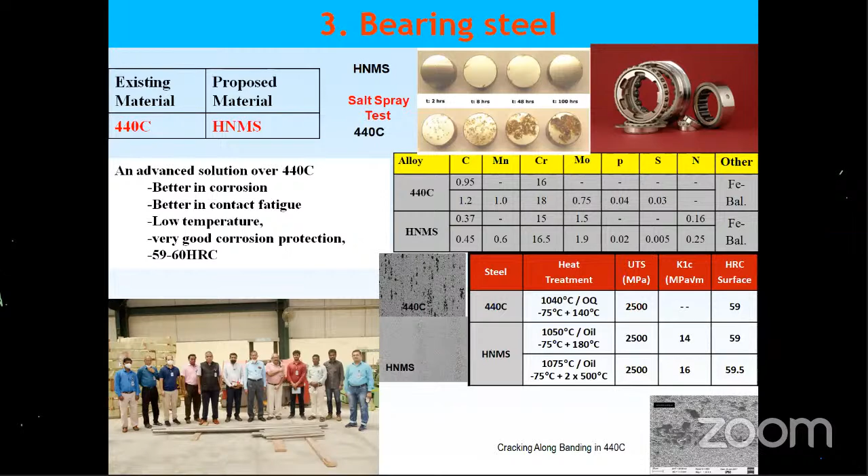Then about the hydrogen application, I made a material. There is a finding actually - the real reason has not been found out - that if the nickel content of the steel is between a certain range, your hydrogen environmental embrittlement is much lower. So we have developed an alloy, and it's made commercially.

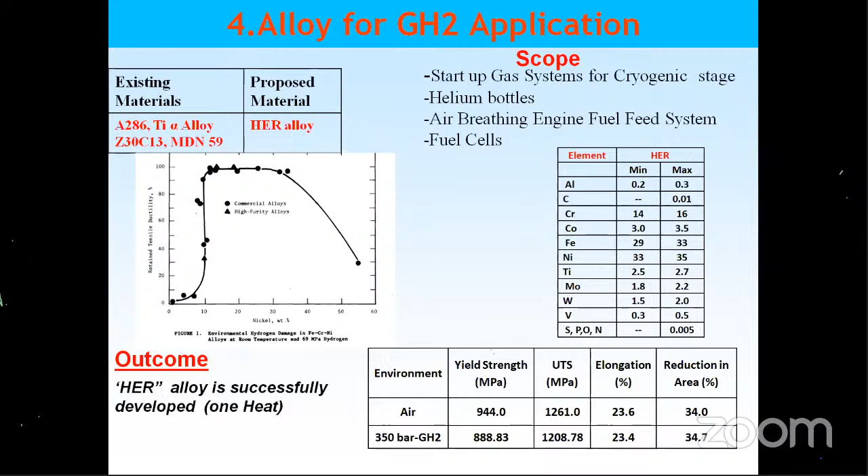This is the composition. This is available in ISRO, and we named it HER alloy, hydrogen environment resistant alloy. This alloy has already been made, and it can be used for any hydrogen gaseous application like valves, pipes, or gas bottles - anything can be made. It's already been made and tested. We got very good properties - elongation has not deteriorated.

So we have discussed materials and requirements, materials for cryogenics, materials for high temperature, environmental issues, and new material processes. I think this gives some picture about what I will be doing in LPSC and what my team will be doing in LPSC, because in liquid propulsion, as I mentioned, we have been using nearly 120 alloys.

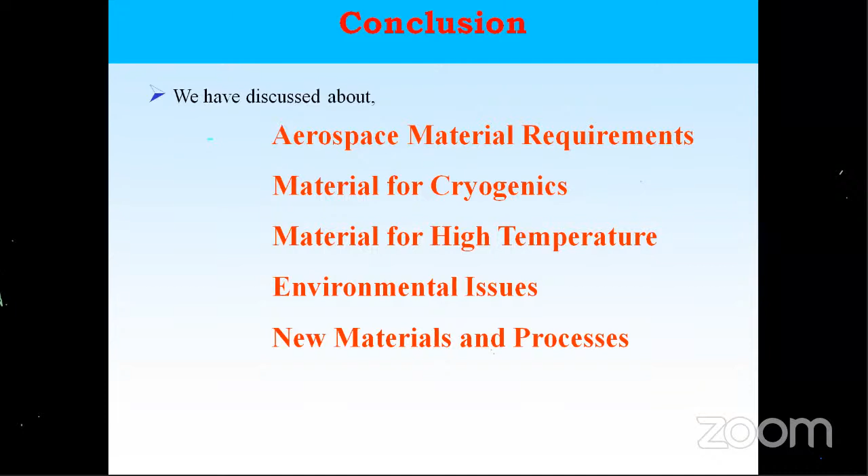We have miles to go. That's all from my part. Thank you for your kind attention, and I expect some good questions. Thank you.

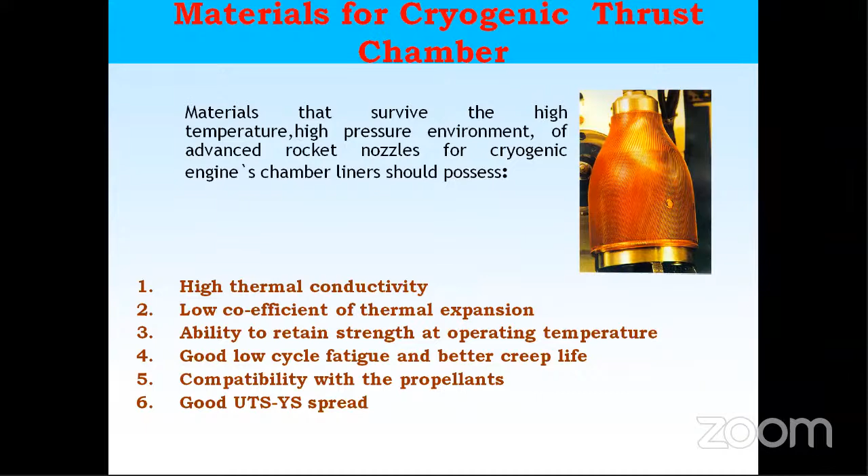Because what happens is, my material, we make a chamber. This is a chamber actually. So we do brazing - they braze the foil and close the channels. The braze temperature is nearly 1003 degrees centigrade, and after that it goes for engine operation. Actual engine operation is about 600 degrees centigrade. At that 600 degrees centigrade, the precipitates come out and strengthen the material.

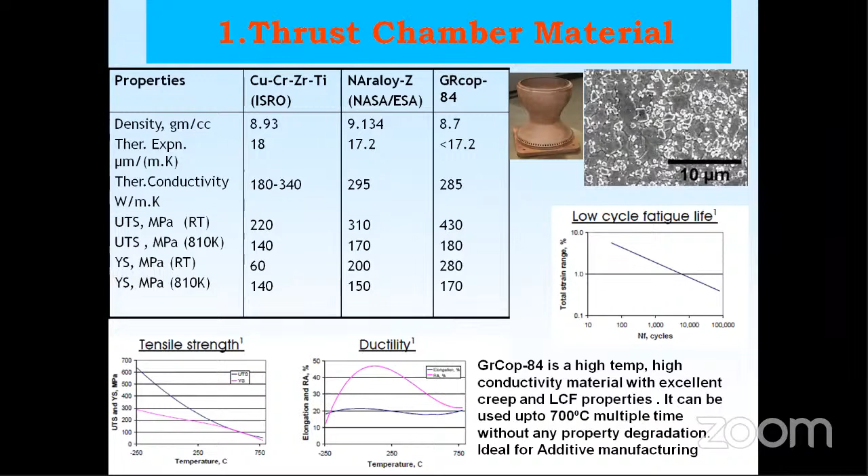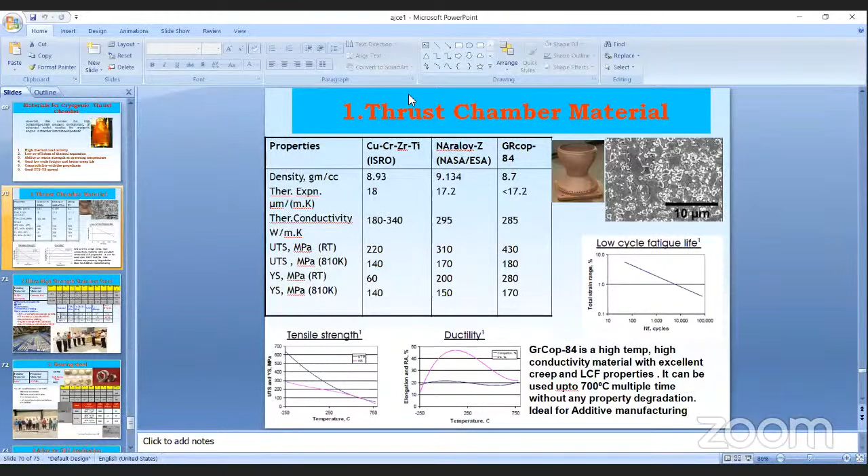Yeah. Hello? Hello? Am I audible? Yes sir, it's audible. Yeah.

The question was, for this copper vessel, would any cryogenic treatment give any benefit? So you can ask Thomas sir. Thomas sir? Cryogenic, no, that's okay.

Only thing, I remember people have done some cryo rolling. See, the problem is whatever you do, finally it has to be brazed, and that effect will be lost. See, the only thing is I cannot use a material in the cold worked condition for brazing - I mean, I can use it, but the cold work effect will be nullified.

Okay sir, okay sir, it's very nice. After a long time, very nice, this conference. Okay sir, very nice PPT. At least from a student's point of view, they can learn very basic things. Yeah, okay sir, thank you very much sir. Okay.

Students, any further questions? You may ask please. Students.